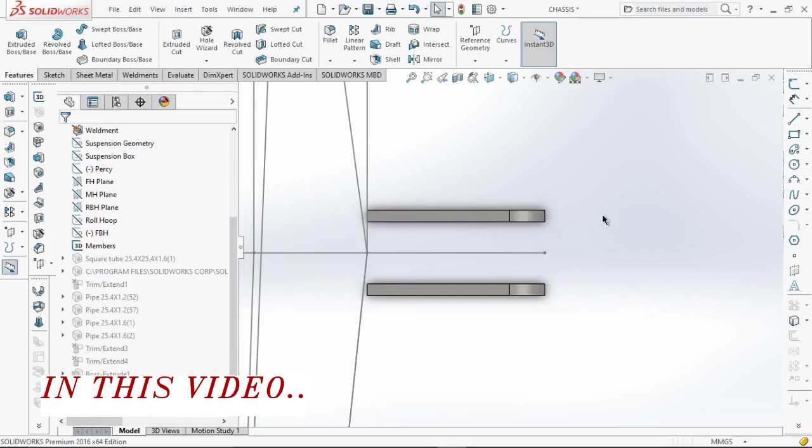So guys, this way we have completed the designing of a bracket for attachment of A-arms on a chassis.

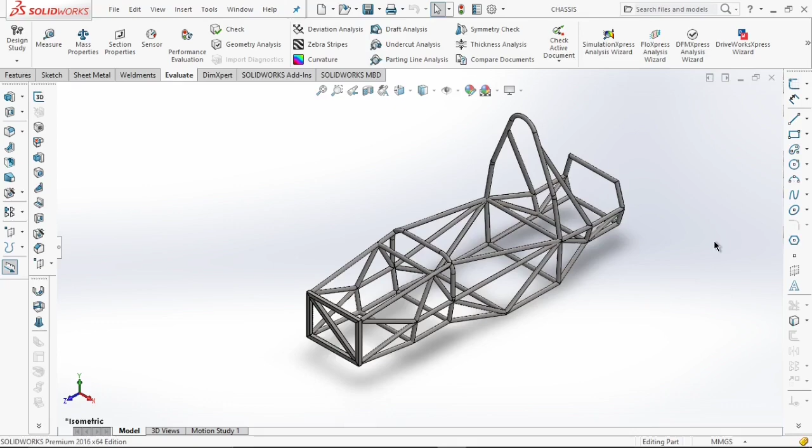So guys, basically there are two methods for designing brackets on the FSAE car chassis. The first method involves the use of features like extrude boss and extrude cut, which is a very simple method. I will design an AIP bracket using extrude boss and extrude cut features.

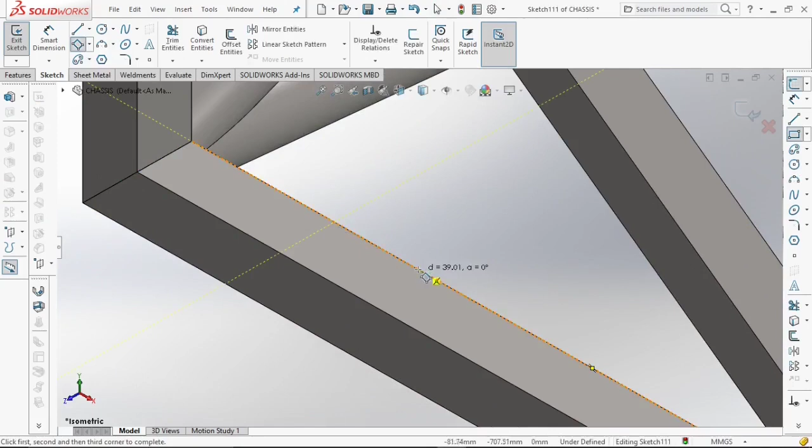For using the extrude boss feature, we require some sketch. First select the plane where you want to design a bracket, then go to the sketch option and select 3-point corner rectangle. Start drawing the sketch from the edge of your front bulkhead, extending up to some distance. Go to the smart dimension option, click on this and give the length as 24 mm. Then give the thickness of the bracket as 3 mm, and define the position of this bracket from the center of the front bulkhead. I will keep this distance as 100 mm.

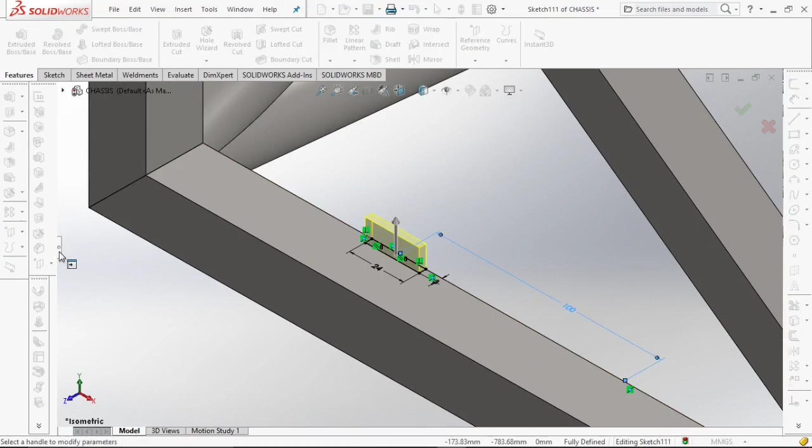Now go to the extrude boss feature and extrude this sketch up to 24 mm. I will select 24, and make sure you select the checkbox for merge result so that this extrude boss will merge with the front bulkhead. Click on OK. So guys, this way we have completed the extrusion part. Now comes the part of extrude cut.

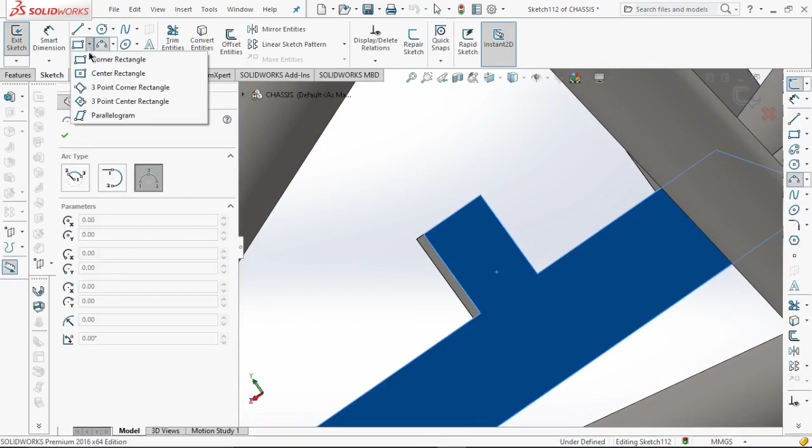To cut this plate to our required dimension, first we need to select the surface. Go to the back side of this plate, select this surface, select corner rectangle, and draw the rectangle from this corner to this corner. Click on OK. Now take a center line and draw the diagonal from this corner to this corner so that we get the center of this rectangle. Now click on circle, mark this center, and draw your circle up to this surface of the rectangle. Draw another circle. Now go to the smart dimension option.

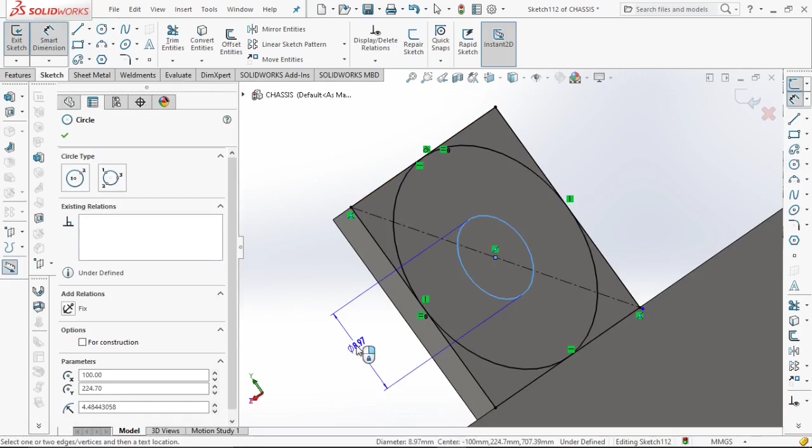Give the dimension to this smaller circle as 8 mm, because I am designing this bracket for an M8 bolt. Click on OK. Now go to the features, click on extrude cut, select all the surfaces which are not needed right now, and click on OK. So guys, this way we have completed the designing of a bracket for AIP.

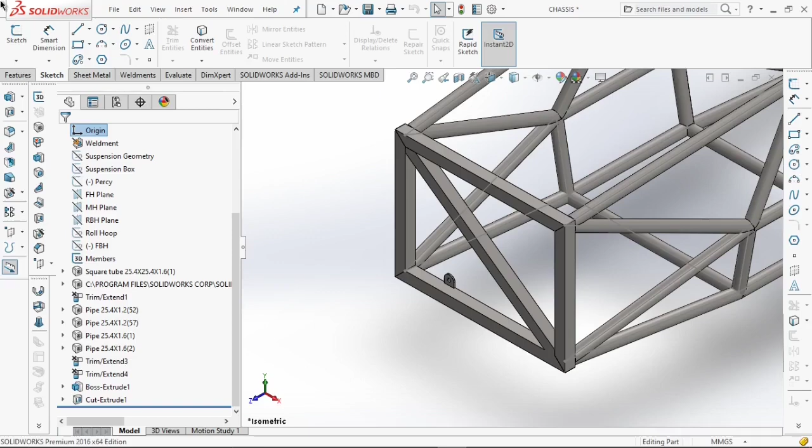So guys, this way we have designed a single bracket. Now if you want to replicate this bracket at some distance, you can go to linear pattern. First go to the feature menu, then you will get the option of linear pattern. Click on linear pattern; this option is used to copy the pattern at some interval. First we need to choose the direction. We want the pattern along this line, so we will select this line as the direction. At what position you want this pattern replicated, you put that distance value here. I will select this value as 200.

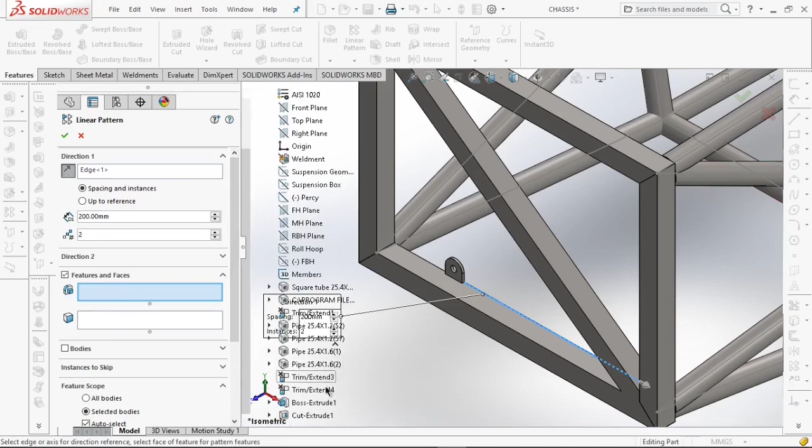Now in the features and faces section, click on this option and go to this arrow, select your recent extrude boss and extrude cut features. You can see this replication is shown to you. Then simply click on OK. So guys, this way we can replicate our bracket at some interval using the linear pattern.

So guys, this was the first method that we have seen using the extrude boss and extrude cut features. Now we move to the second method, in which we are going to use the weldment feature.

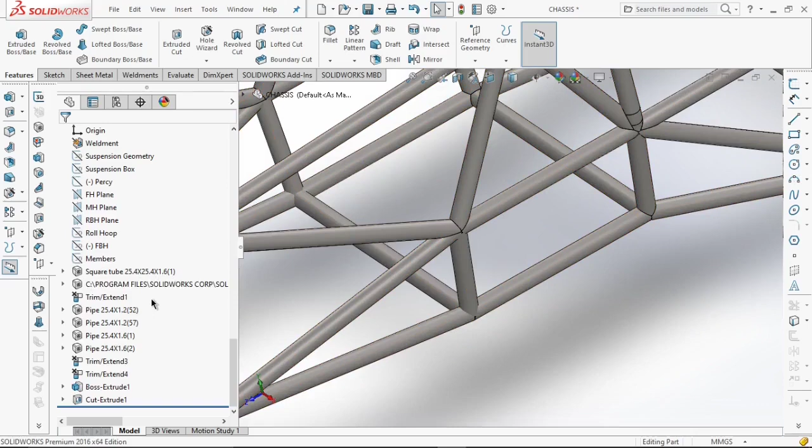Before clicking on this weldment feature, we require some sketch where we want to draw a bracket. So we suppress all these weldment part files from this to this, then make these members show.

Now we are going to see how to design a suspension bracket. We are supposed to attach a bracket on this node, so we need to draw a line so that we can use the weldment feature option.

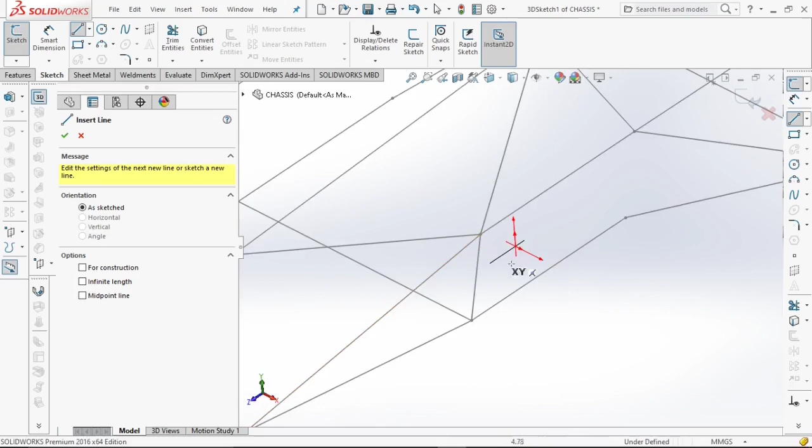First go to the 3D sketch and select a line. Make sure the pointer shows the XY direction, verified here, as we are drawing on the XY plane. Draw a straight line, click escape, go to smart dimension and give the line distance as 45 mm. Click OK, now exit this sketch.

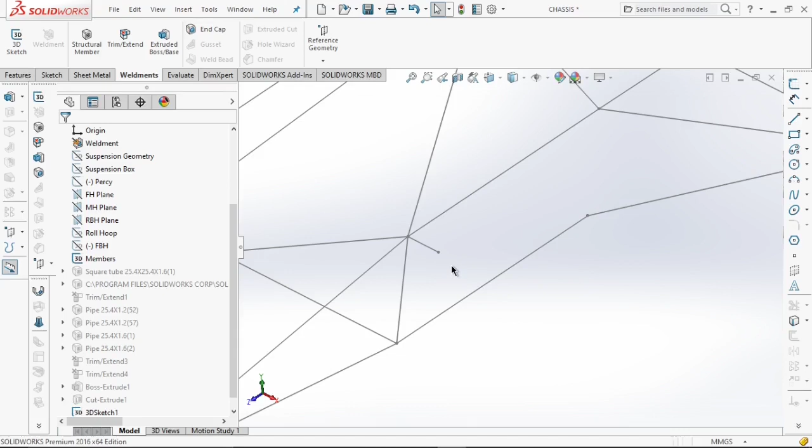Now we can use this weldment option over this line. But there is a catch: we require a custom weldment profile for designing this bracket. If you haven't watched my previous videos on how to add a custom weldment profile in SolidWorks, you can watch that. I already have made a custom weldment profile.

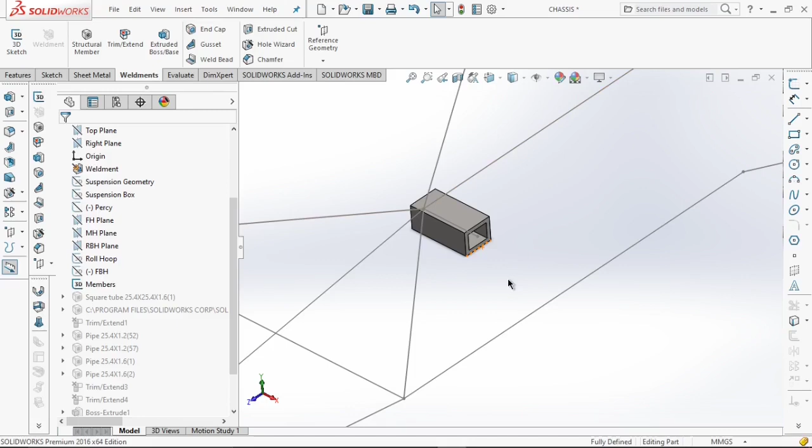Now the last thing remaining is to cut this square tube to our required dimension. First we cut it from the side view: select a plane, go to sketch, select a corner rectangle from this corner to this corner, draw a circle, then draw one more circle.

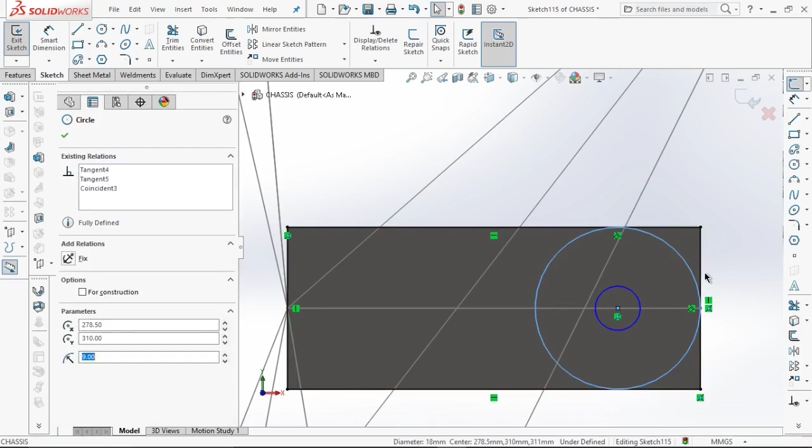Now give the relation to this circle and the line as tangent from all sides, because if there is a gap it won't extrude cut properly. This way we have fully defined this circle.

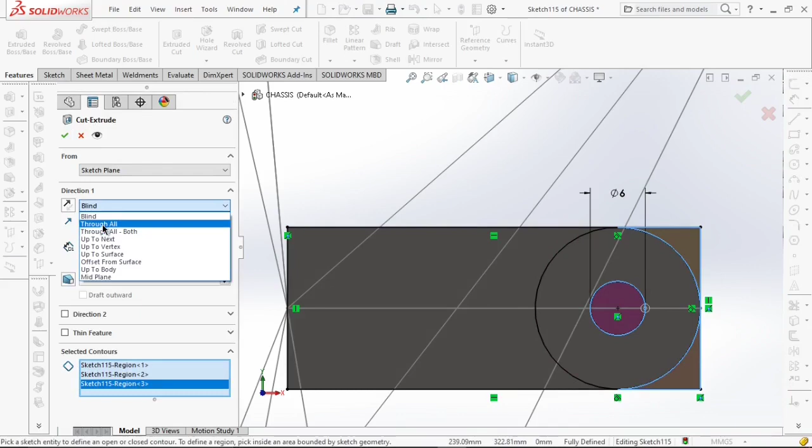Now comes the inner circle. We are designing this bracket for an M6 bolt, so the diameter of the inner circle will be 6 mm. Go to the feature option, click extrude cut, select this inner circle and these two outer parts, click through all, then click OK.

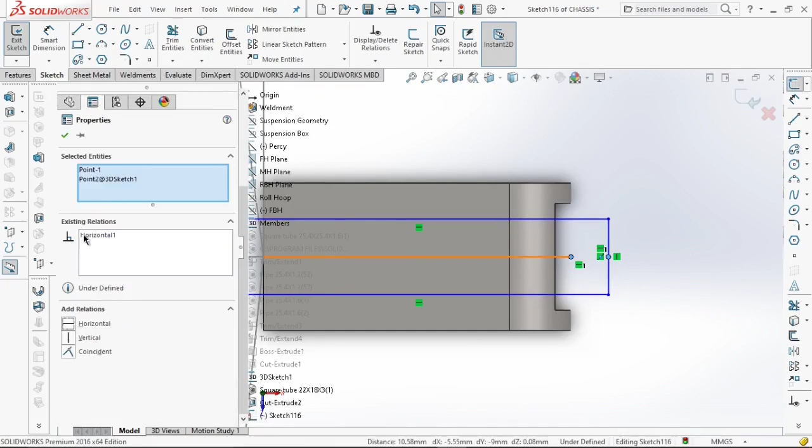We have cut this profile according to our need. Now we cut the profile from the top view: select the top surface, click normal to view, draw one more corner rectangle, click on the center of the rectangle and this centerline and make it horizontal. Click smart dimension and give the distance to this side as 16 mm.

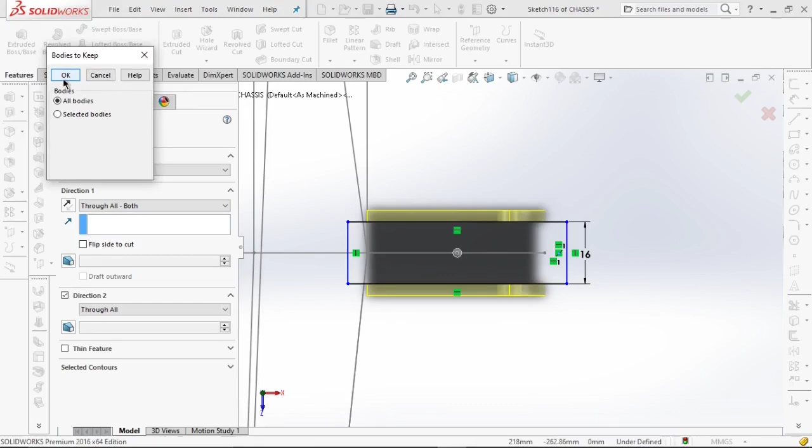Click OK and stretch this rectangle beyond the surface of the tube. Go to feature, click extrude cut and select through all on both sides, then click OK. A pop-up will appear; make sure you select OK to keep all the bodies. This way we have completed designing a bracket for attachment of A-arms on a chassis.

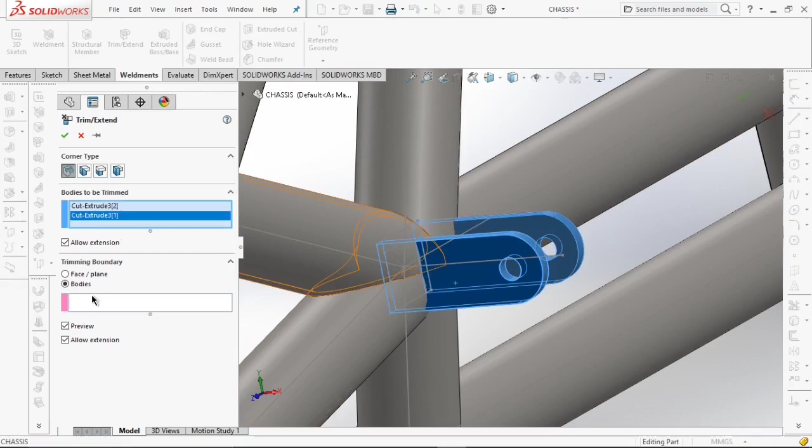Now we will unsuppress this part. A few moments later, you can see these brackets are going inside our tubes, so we will trim this part. Click trim extend: bodies to be trimmed will be these two, and the trimming boundary will be this pipe. Make sure you uncheck the allow extension option. This way we have trimmed these brackets.

So this was about today's video. We have seen how to design a bracket in two ways: one using the extrude boss feature and another using the weldment option. I hope you have enjoyed this video.